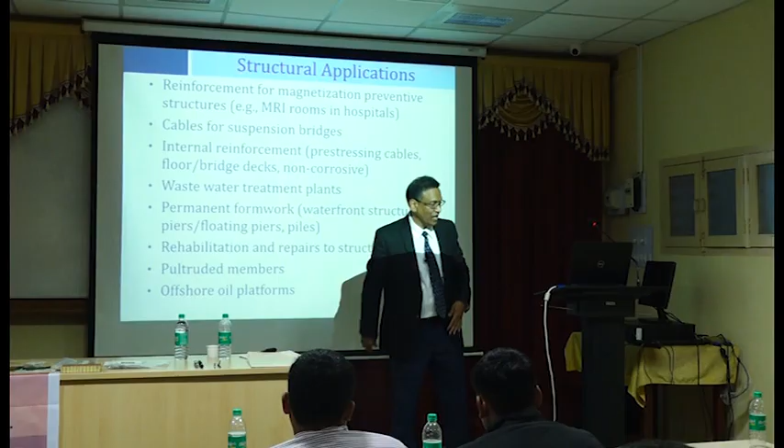Structural applications, of course: bridge decks, they are using FRP in some demonstration projects. Wastewater treatment plant, that's a very good application to consider FRP bars. We'll talk about permanent formwork and other stuff in a minute.

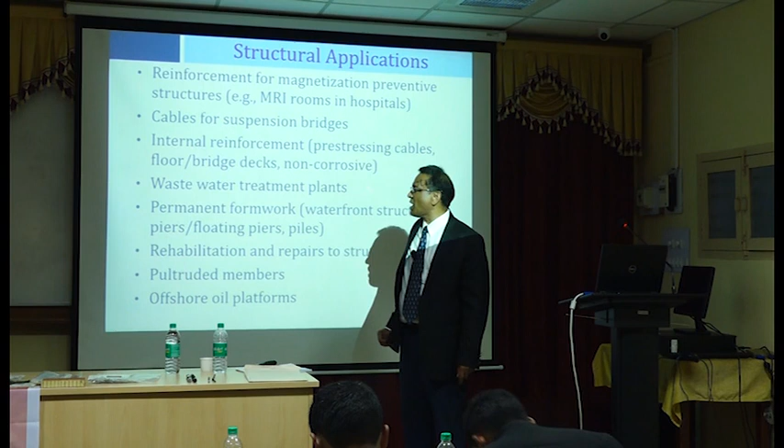Now, repairs and rehabilitation, this is really going in a big way. For example, California has lots of bridges, very large bridges. Some of you may have gone to California. You'll see those bridge columns are 100 feet tall and 10, 15 feet in diameter. A lot of big columns.

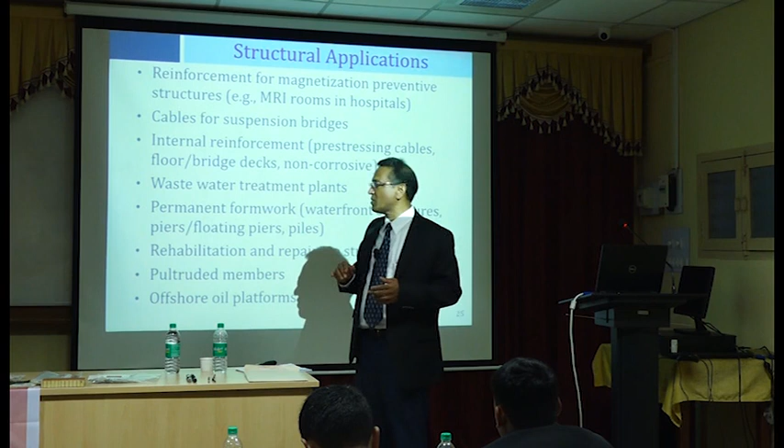So recently they changed the earthquake resistance requirement. They increased the capacity requirement for earthquake resistance. So by regulation, the state mandated that every bridge column be rehabilitated to resist larger earthquake loads.

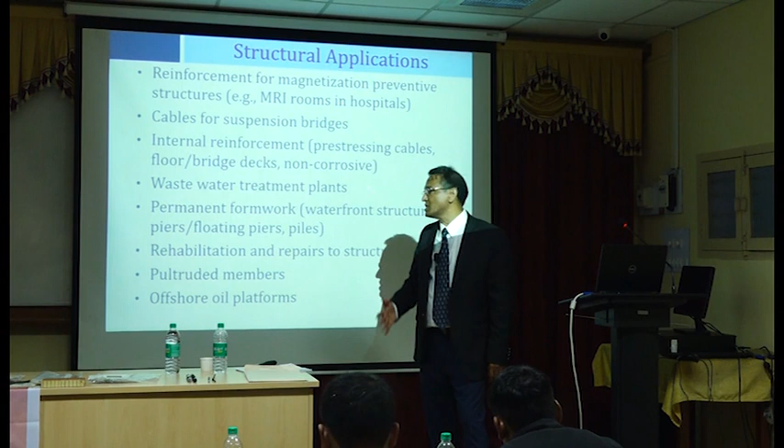That may happen even in India because of recent data. They may change that requirement and ask you to improve the strength capacity of columns. In that case, you can actually use FRP materials, but it's a different form of material. I'll talk about it in a minute.

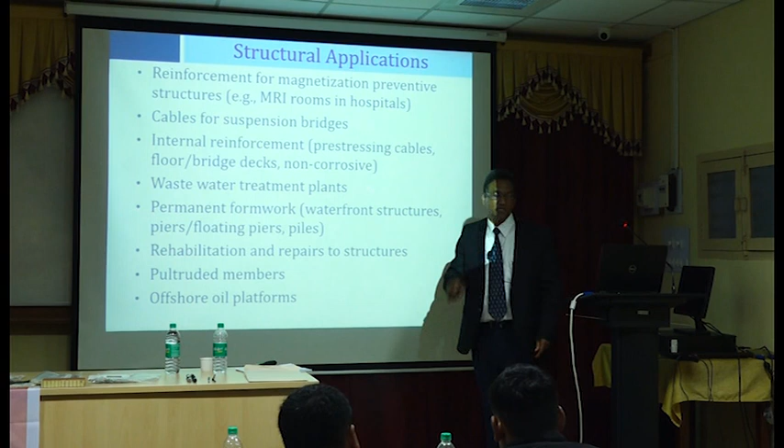And then there are pultruded members, and in offshore platforms, they use FRP quite a lot. In fact, one of the Indian companies is fabricating lots and lots of these gratings. Everywhere you go, you'll see those FRP gratings produced in India, in a lot of places.

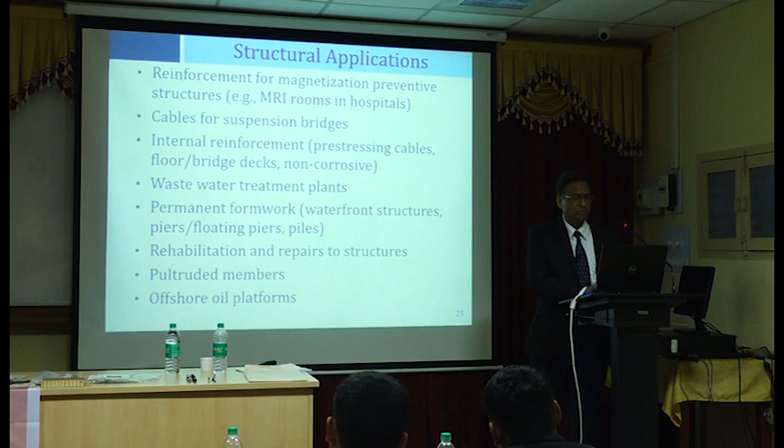So there are two, or even three, types of FRP materials. One is internal reinforcement.

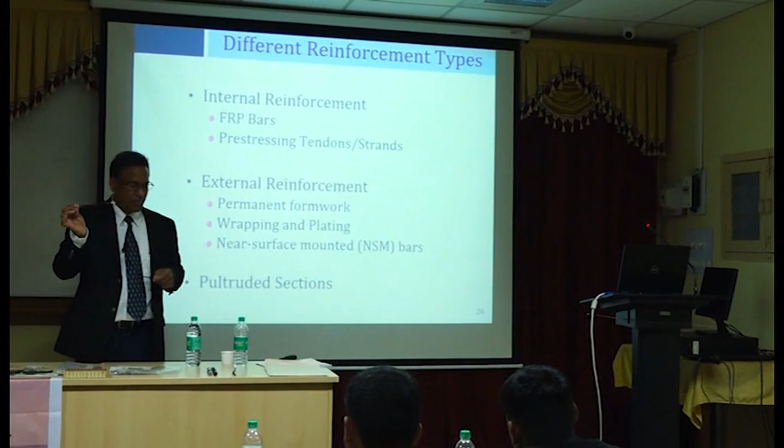I brought some samples. Be very careful. Don't touch these bars other than where I have covered them, because they have very fine fiber. It can poke you. The sizing on this one is silicone sizing, so it can give you a little bit of itch. So don't touch them anywhere other than where it is covered.

So I have quite a few samples here, and Dr. Das also has some samples. So when you get a chance, you can come up here and take a look.

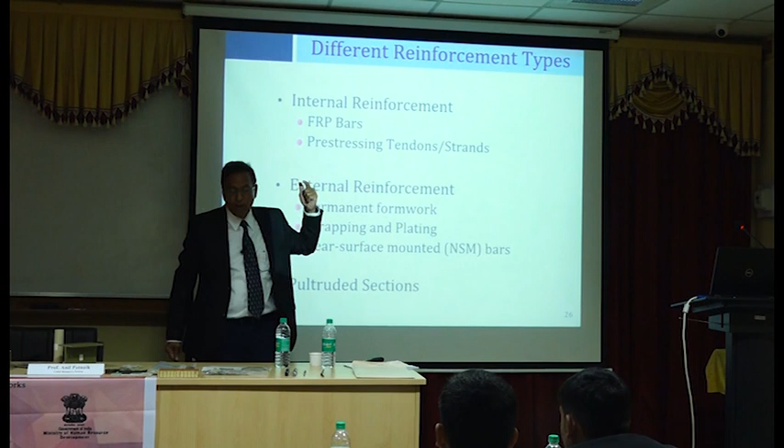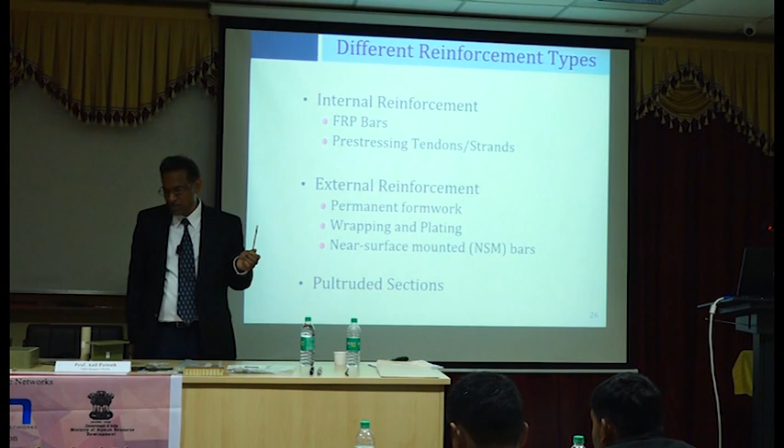So the first ones are FRP bars. Those are for internal reinforcement. Generally these bars are small diameter bars. This one is a 5 millimeter bar. 10 millimeter bars are very commonly used. Because of high strength, you can use smaller diameter bars.

And then I have the traditional steel bars. You can actually hold these in two hands, one traditional steel bar and one FRP bar, and you can see the difference, okay?

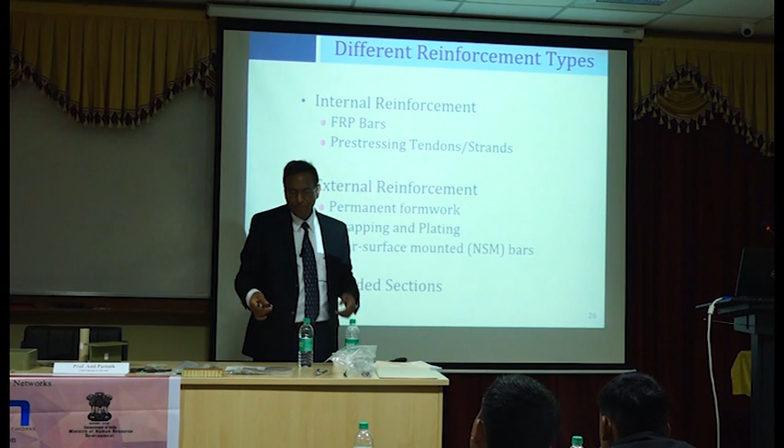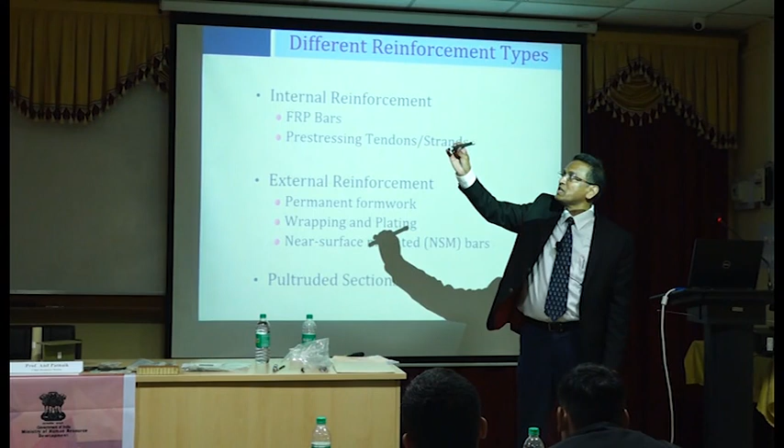I have a pre-stressing tendon. This one here, this pre-stressing strand, is made from carbon fiber. It was used in one of the bridges near my hometown, and they successfully used it in a bridge. That means it's not a theoretical product, it's a real product used in bridges.

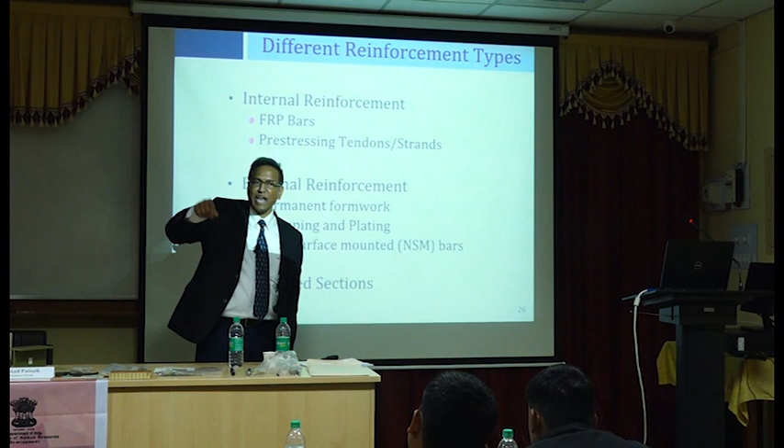And many of you may have seen the steel strands, quite heavy. They're very good, and when you are jacking those strands, it's easier to jack steel strands. I don't know how many of you are familiar with pre-stressed concrete. How many of you are familiar? Okay, have you seen any pre-stressing plant?

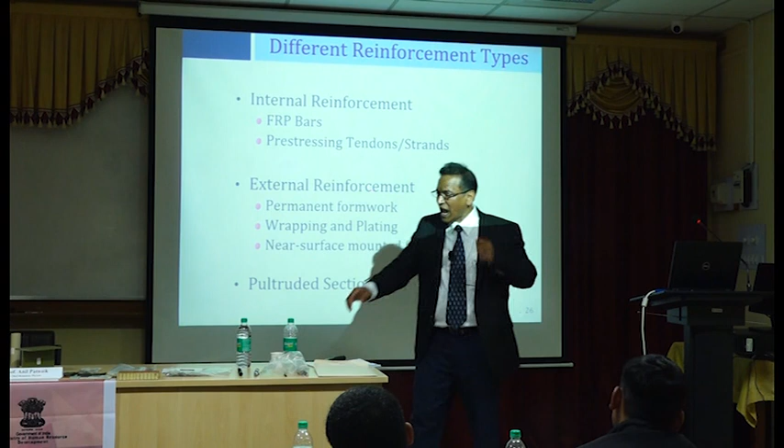Have you seen how they actually tension? Very good. So they grab on this pre-stressing strand and they just start tensioning without any problem, right? You just hold it, that's it, no problem. They don't crush.

Whereas this one here, carbon, is very soft in the other direction. So you grab on this, it will become completely crushed. So this is a Japanese design: they designed a transition piece from carbon strand to regular strand.

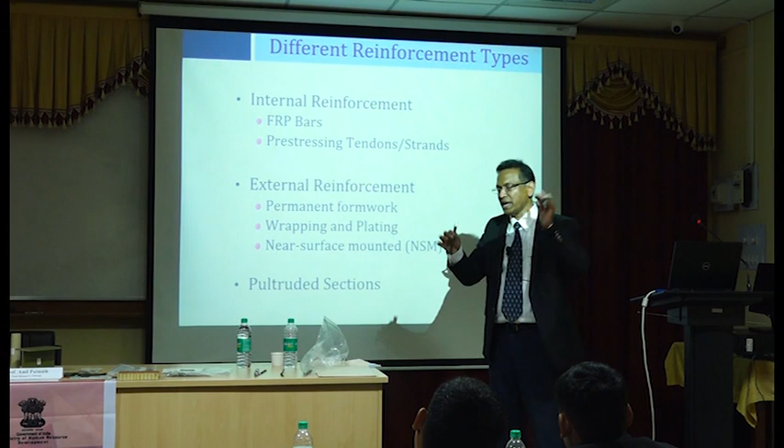And then that transition piece is actually outside the beam element or the member. So they pull on this steel strand, and once it is fully stretched, they anchor it, and that's it. And it worked very well.

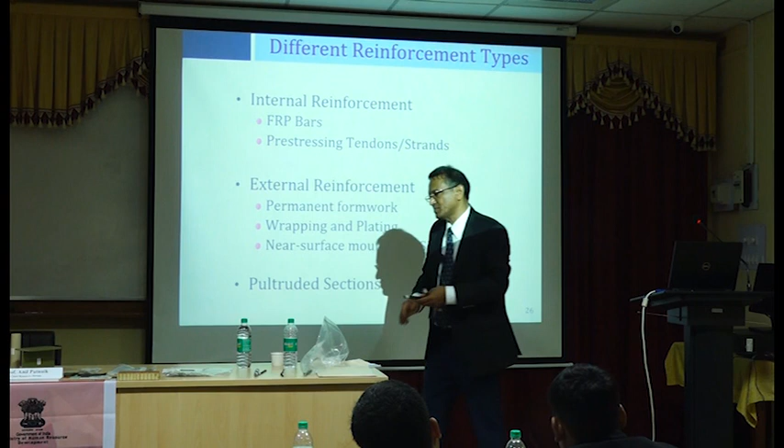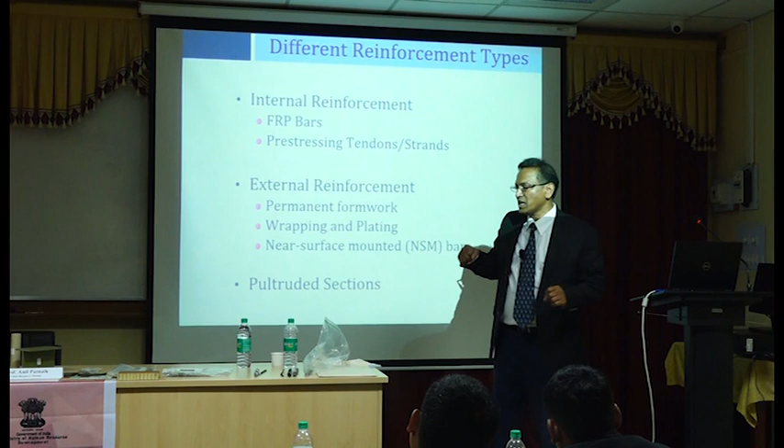It's primarily in where I live, where Ohio State. Mostly we use pre-tension applications. That means it is tensioned first - the strands are tensioned first. You place the concrete, let the concrete set, and then you cut the ends of the strand. So that's pre-tension, right? It's not post-tension.

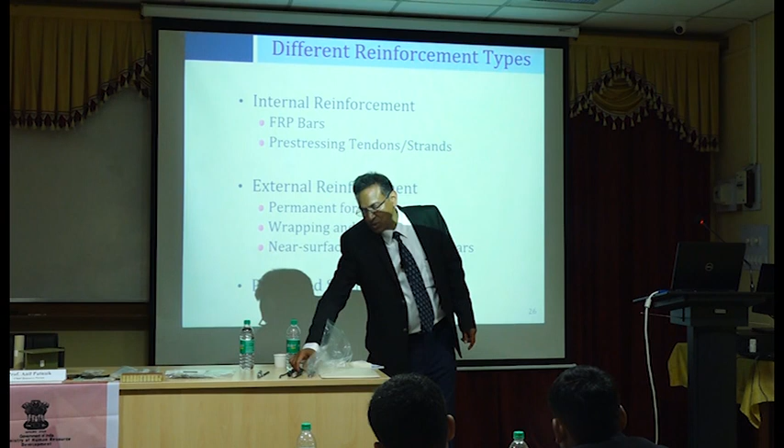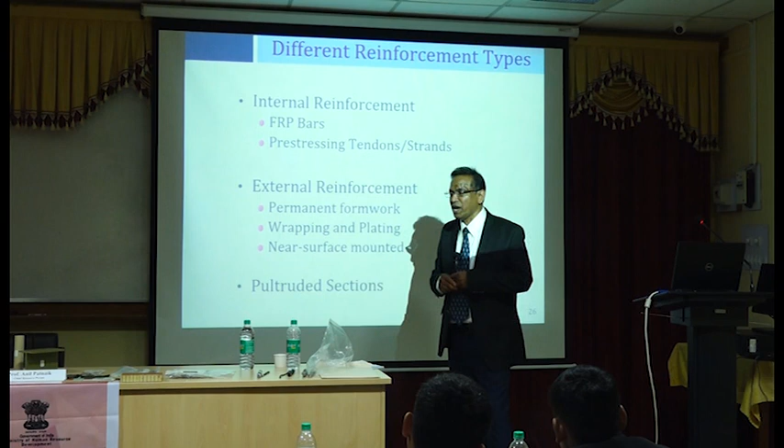So carbon strands may or may not be useful in post-tensioning, but in pre-tensioning for sure they can be used. So in my state, for some reason, we always use pre-tension because it has to be done in a plant environment, and we have only a couple of pre-stressing plants in this state.

That's your pre-stressing. ACI 440 has one document just for pre-stressing strands and pre-stressing members, design of pre-stressing members. You can take a look, but this is not as close to application as FRP bars. What I mean is there's a long way to go before you can use pre-stressing tendons made from carbon fiber or any other fiber.

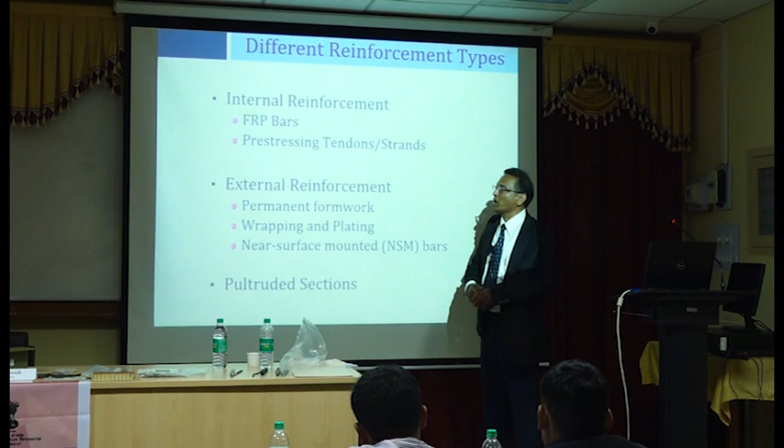There's also external reinforcement. We won't talk much about this at all. I'll just give you a brief introduction, but our focus will be just on internal reinforcement. We need another week for this type of external reinforcement, and we're not going to do that because of the time constraint.

So you can have permanent formwork. I'll show you some pictures of what it is. Permanent formwork is like this small tube, but they make larger tubes, and that can go in, then you place the concrete inside this. It becomes a very good member after you do that.

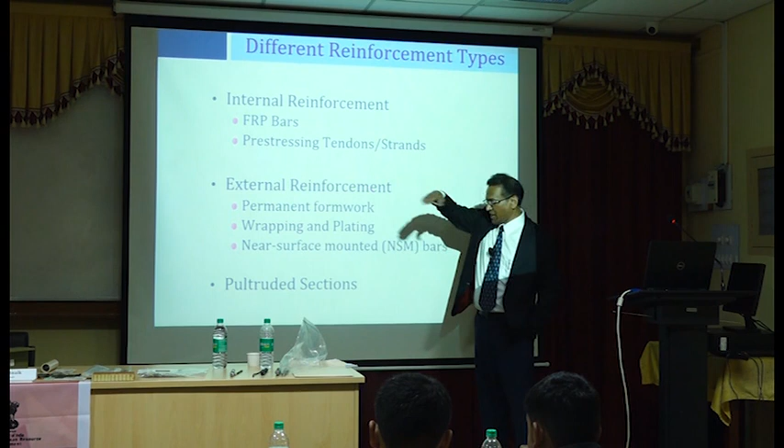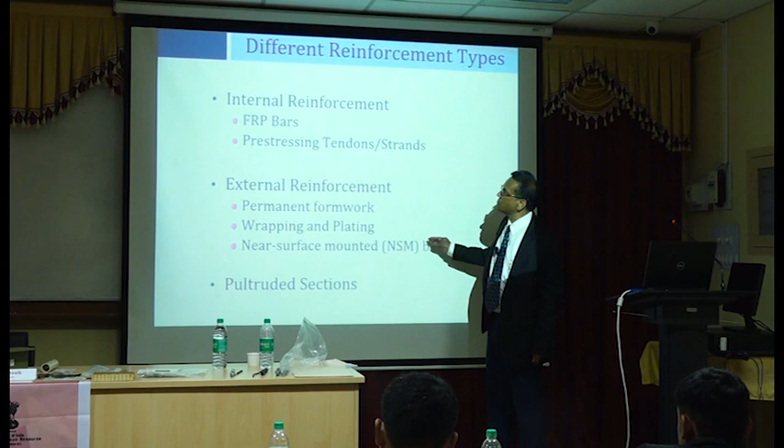Wrapping and plating: wraps means sheets wrapped to columns. Near surface mounted bars, design of NSM members is similar to internal reinforcement design, but I put it here because it's a surface application. Then pultruded sections, you have FRP pultruded sections, these ones. It's just like steel members, okay? Just like steel members, everything exactly like steel members.

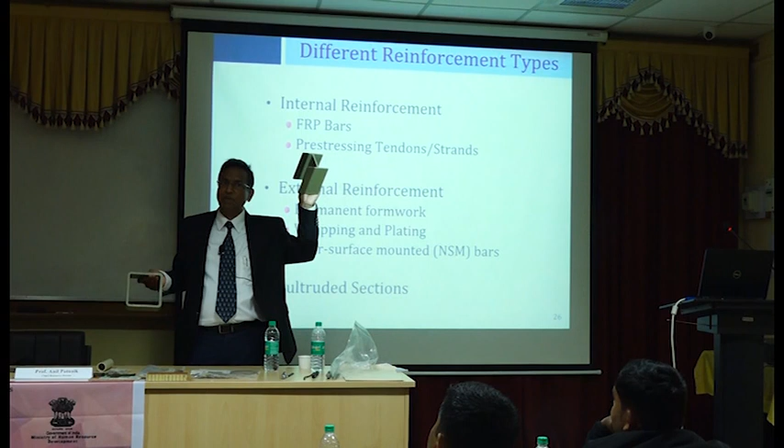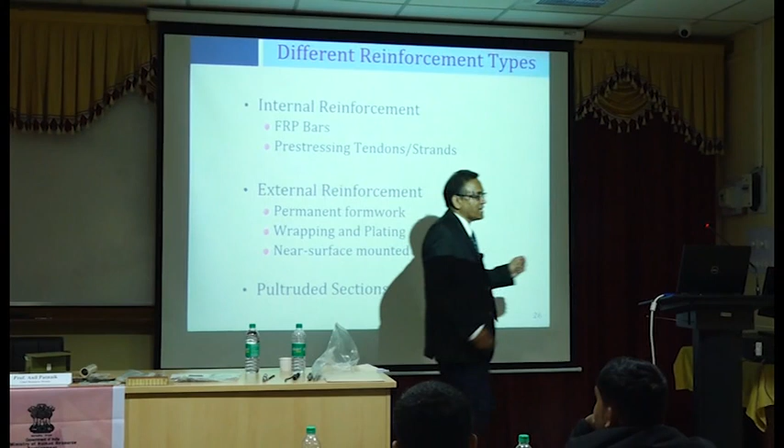And they use this in waste treatment plants. They are able to use this. It's not as strong as steel, not at all, particularly in pultruded condition. So those are the three classes of applications.

So let's talk about the internal reinforcement. This is a bridge deck reinforcement. This mesh here is a bridge deck mesh. Unless I tell you that's FRP, you will not really know that it's FRP. It's completely similar to steel reinforced mesh.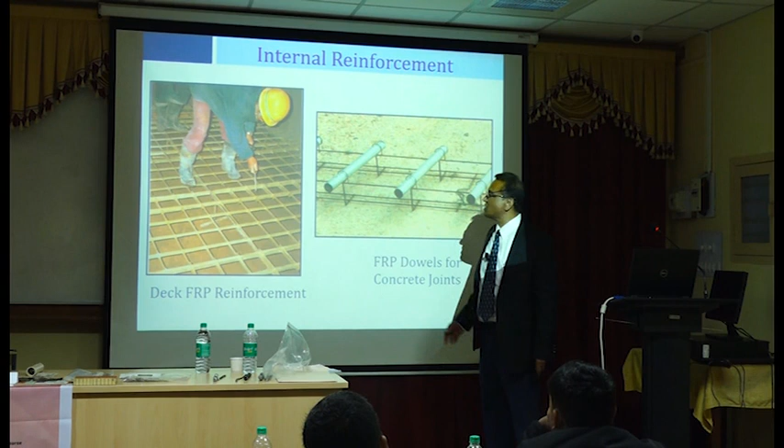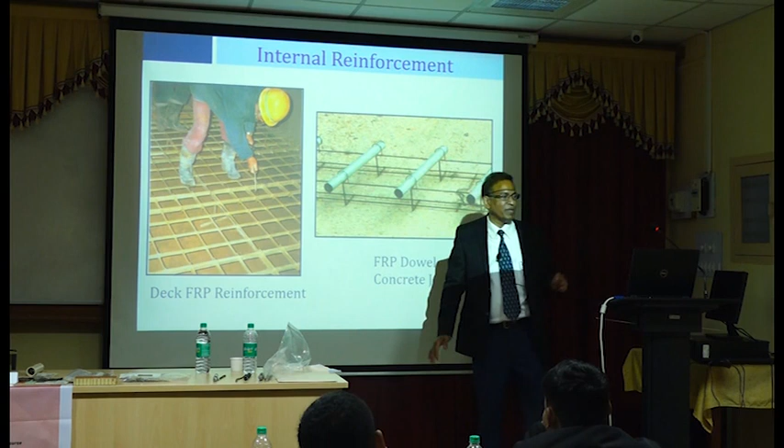Then dowel bars. Are you familiar with dowel bars? Yes, very good. So dowel bars nowadays are very common. They use FRP dowel bars, which is common. The only problem with dowel bars, we'll talk about it when I explain micromechanics: the strength in this direction, the dowel action, is very small because the fiber is in the longitudinal direction. Strength in the transverse direction is very poor.

So that's a problem, but they are using FRP dowel bars. Internal reinforcement looks exactly or similar to our steel reinforcing bars. I have just a few samples here, you can take a look.

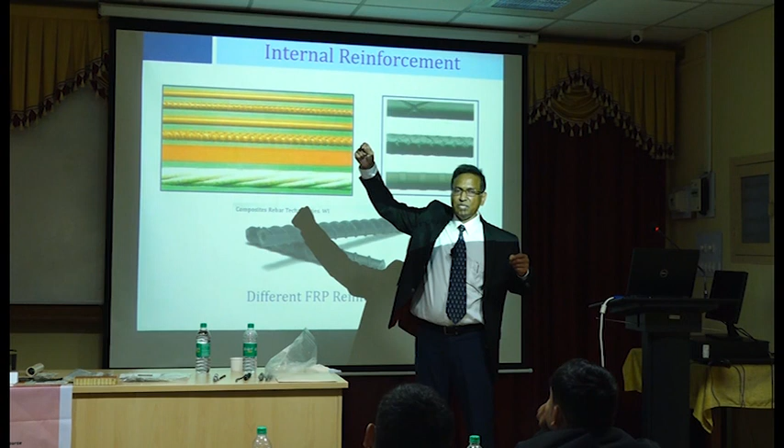One of the major problems here is the deformations on the surface. Surface deformations is a big problem. These deformations are made with a spiral fiber wound spirally. Does it make sense? But that's not as strong as your steel ribs.

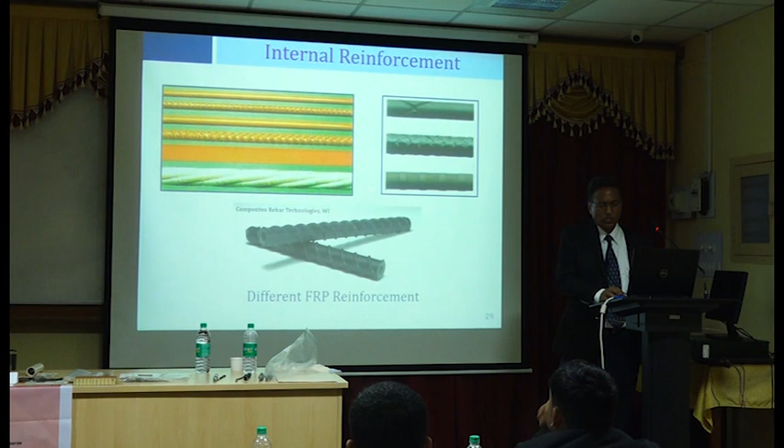Steel ribs are very, very strong, and the ribs engage the concrete surrounding the bars, and that's what gives you the bond strength or the pull-out strength. Whereas in FRP, this can easily shear off at the surface, so these deformations can shear off at the surface. That's the major problem, so you need longer development lengths or longer embedment lengths. They're trying to copy the surface geometry of steel bars, but it is not as strong as steel ribs.

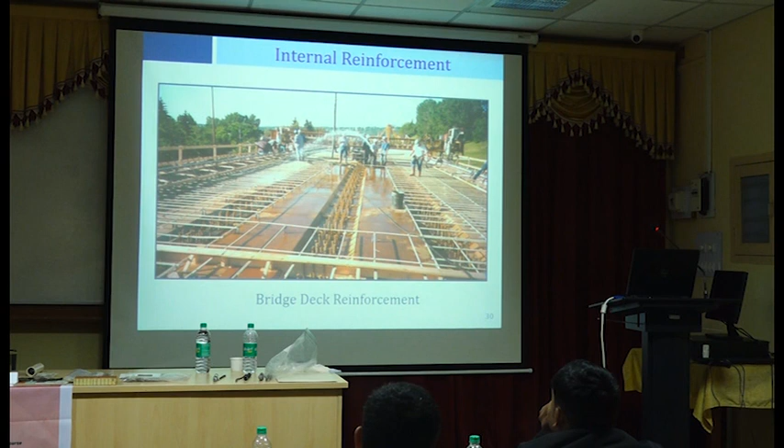Same thing here, this is a bridge deck. This is a steel bridge with all these shear studs. You can see the shear studs, and then you have FRP reinforcement. So it's successfully used, and slightly more expensive material-wise, but it's possible to implement those in those applications.

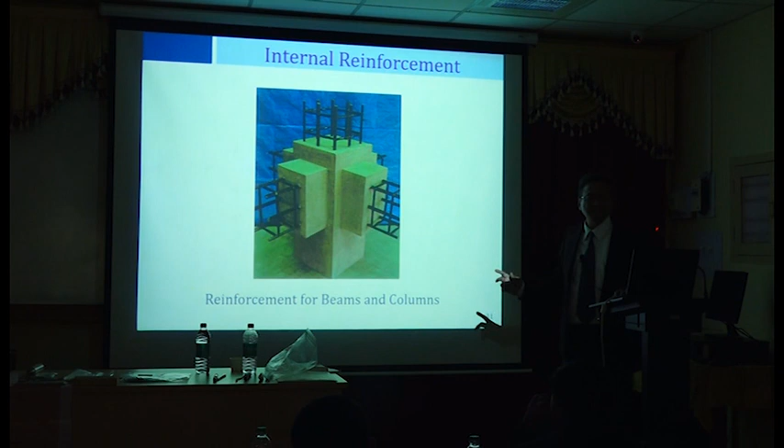So here we have a beam column joint, which you can make with FRP bars. It looks something like this. We'll talk about the design of this kind of members. We really don't want to use FRP anywhere there is compressive stress or compressive loads.

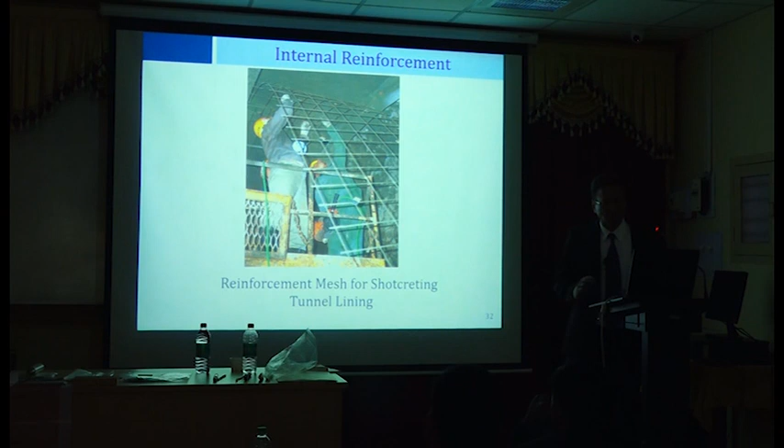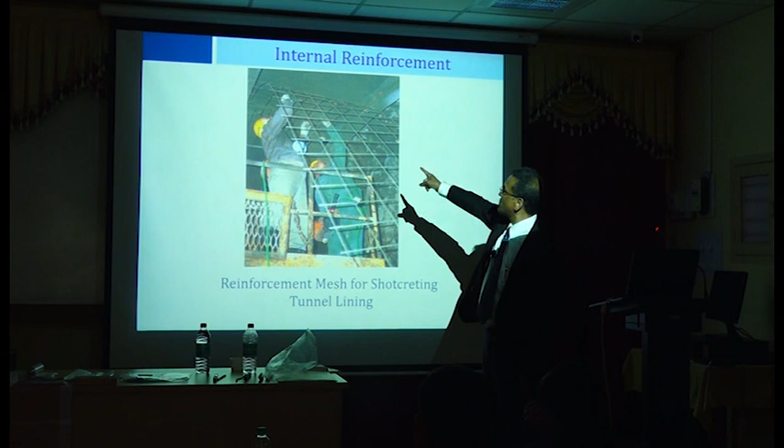So tunnel linings, this is a very common application these days, because look at this guy, it's an overhead application, right? Imagine using steel mesh here. They do use steel mesh, of course, but this one here is so light. He's able to handle one person here, another person here. Two people are able to handle this mesh, which is a big advantage.

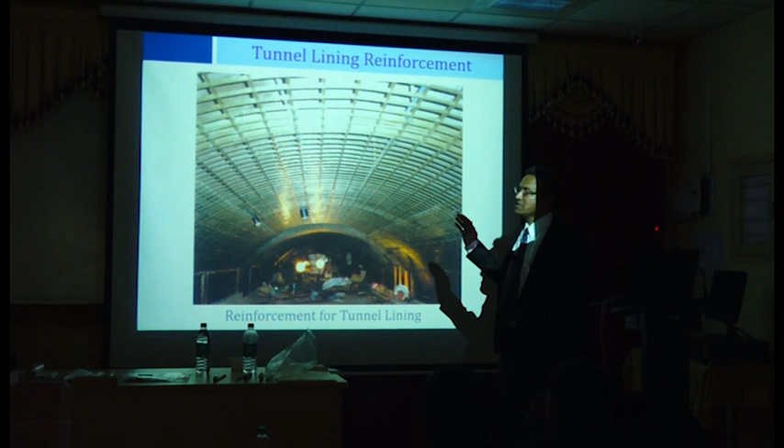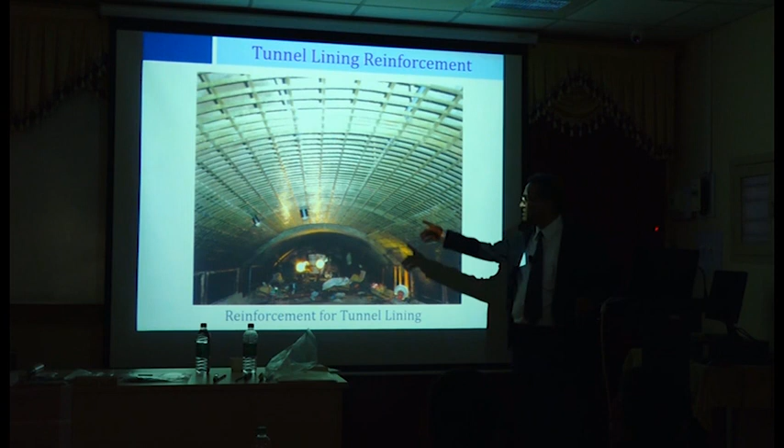Once it is in place, the mesh may look like this, just like steel bars. Tunnel lining is always subjected to a lot of moisture. There's always water seeping. If you have walked near the underpass here on campus, you see it's all wet. That water is coming from somewhere, and that's exactly what happens in this tunnel lining here.

So FRP is a good material. Of course, they do a lot of shotcreting for liners, but sometimes you need this kind of thick lining with a lot of reinforcement.

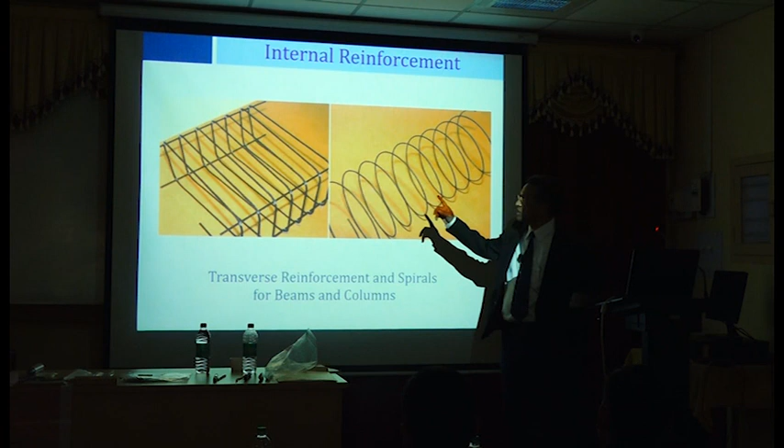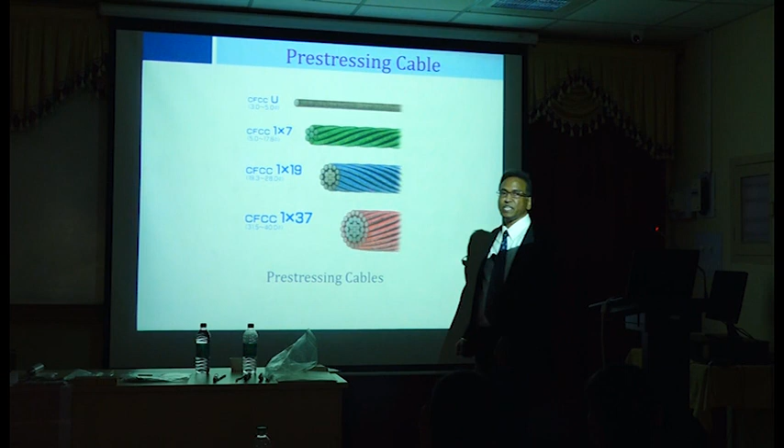We have prefabricated ties and spirals. That's possible, we'll talk about some problems with ties later. And then pre-stressing cables, I showed you one of those. These are all Japanese products, and they are available to use. They will give you technology for even tensioning these strands, with a patented anchor system. I have no details, they do it themselves, but this can actually be tensioned.

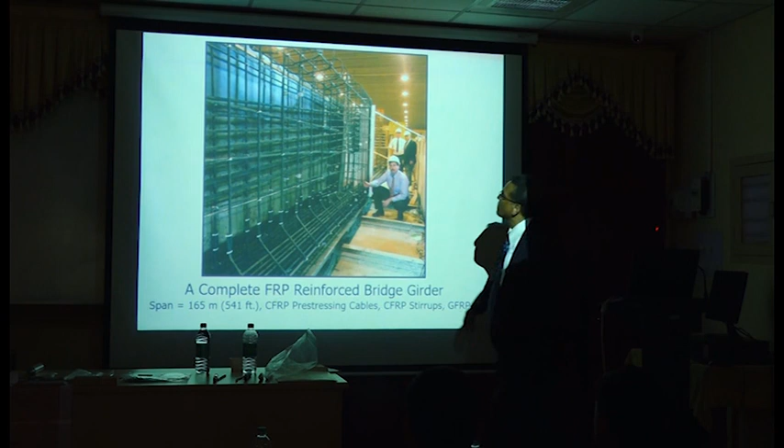So precast, pre-stressed concrete bridges can be done with FRP. It's a huge beam, you can see how tall it is. These people are about 5'6", 5'10", 6 feet tall.

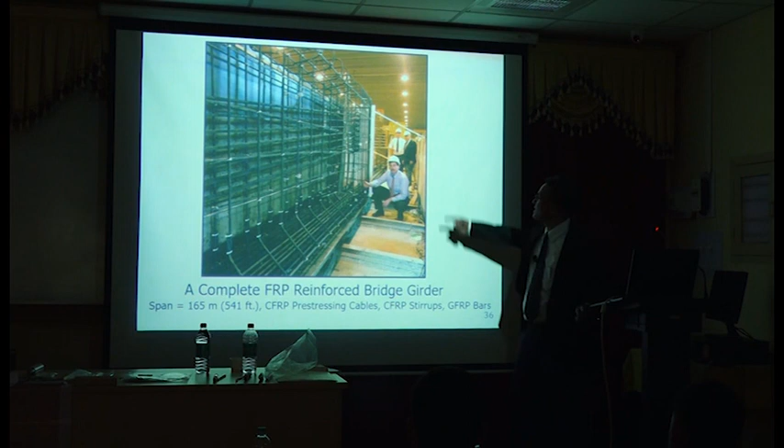I don't know if anybody knows Rizkalla. If you have done any research on FRP bars, you'll see the Rizkalla name. This is that Sami Rizkalla. He's a very eminent professor.

Now let's talk about external reinforcement. Here we have permanent formwork, wraps, near surface mounted bars, and so on.

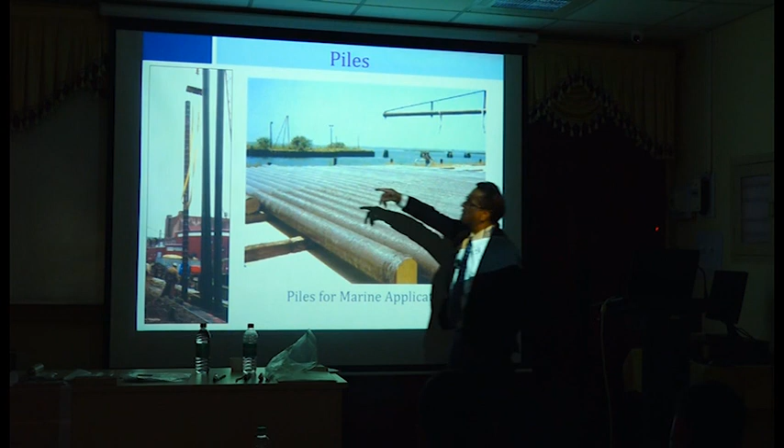What you see here is precast piles, so you have tubes like this. Here they are actually placing the tube first, then they'll place the concrete. But here they have tubes already filled with concrete. You pick them up just like normal steel piles, and then drive them with this pile driving equipment. You just drive the pile, it's like just any other steel pipe. You can do that quite easily, or at least they have done it quite easily.

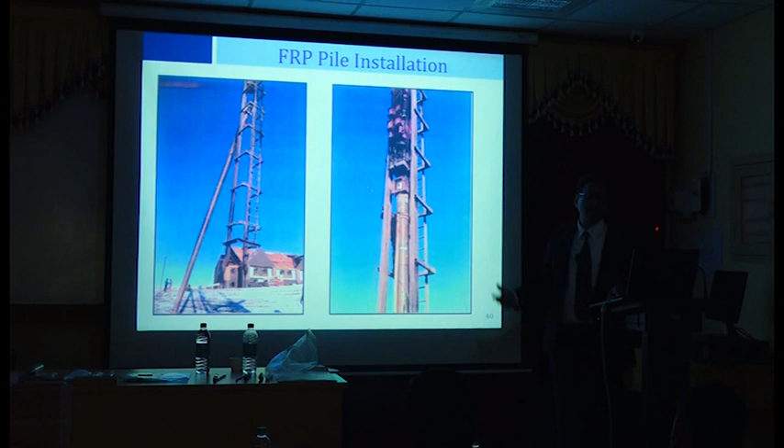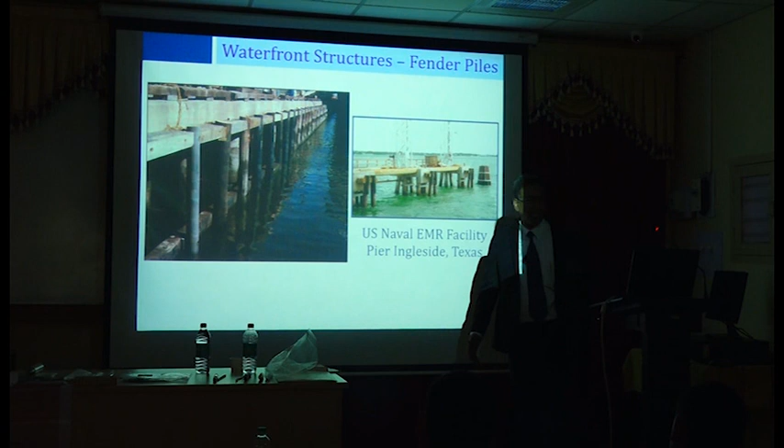For waterfront structures, you have these fender piles. Fender piles can be FRP tubes filled with concrete, that's what you have here. Same thing here, these are some naval facilities, so they have been using this for oceanfront structures.

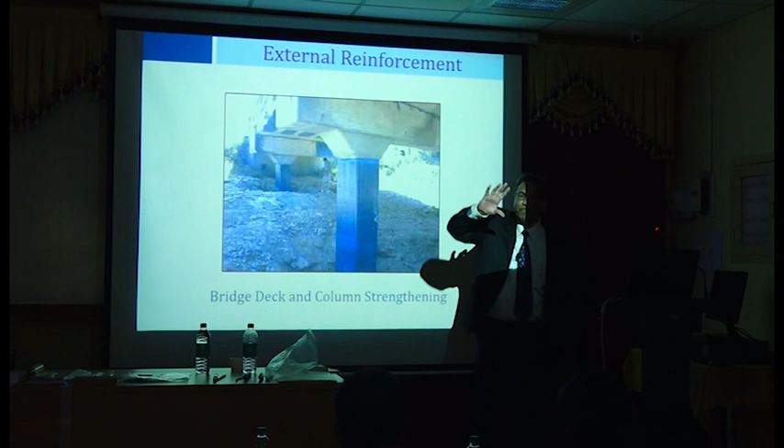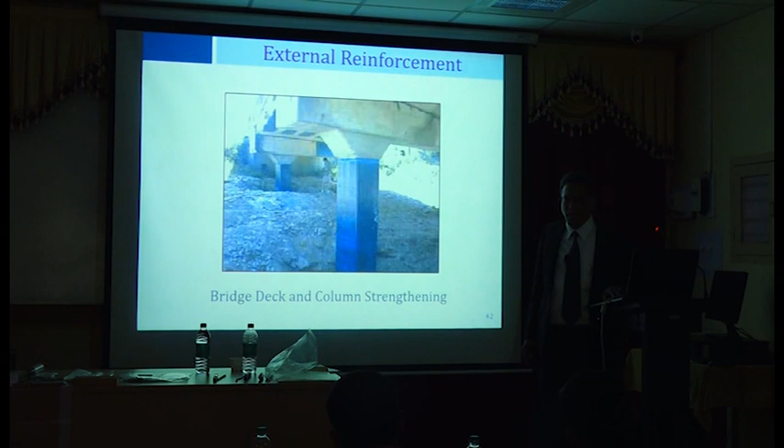You can have wraps for columns that will improve the compressive strength of columns. Generally speaking, circular columns will have better effectiveness in terms of strengthening. We are not going into design basics for external wraps, but generally speaking I can explain it to you without any slides. So this is another type.

This is exactly what they are doing in California. They are required to wrap all the bridge columns, I think by 2025 or something like that. I'm not sure, but it's mandated to rehabilitate all these bridge columns, so that's a big business in California. They are using a robotic arm that wraps and goes all the way to the top.

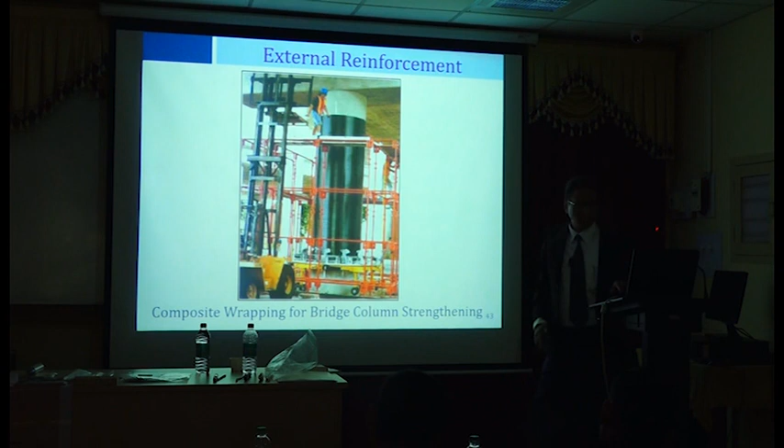So what's the effect? How do we get the effectiveness from FRP wraps? This is what is done. Let's say this is a bridge column, and it completely crushed the concrete due to overloading in one of those earthquakes in Japan, I believe. When the load is in the vertical direction, the column is overloaded and everything is crumbled. If you see carefully, these bars are actually bowing out.

You can see that, right? These reinforcing bars are bowing out. Unless you have very closely spaced spirals, this kind of failure is very common.

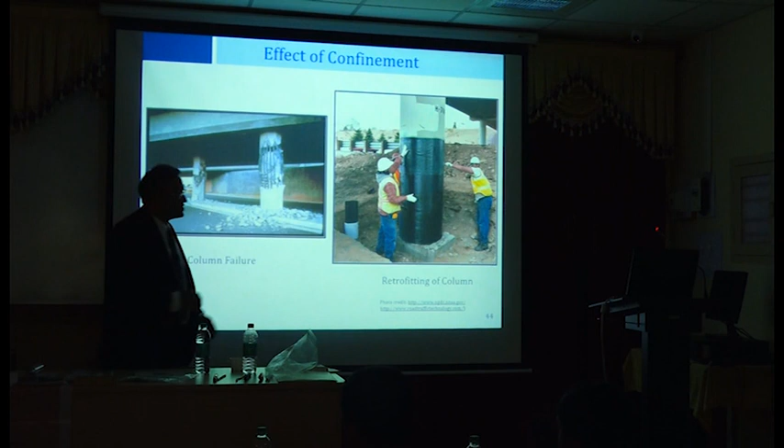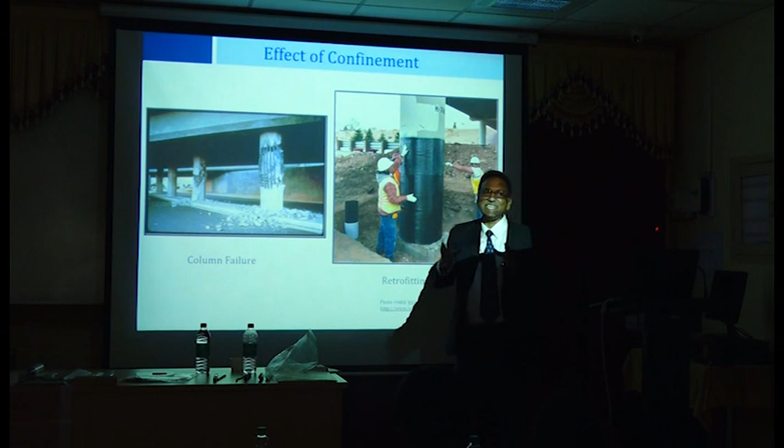So to prevent this, you put the wrap, it's like a sheet. There are some sheets here, I can show you. Those sheets are wrapped with a polymer-based resin, which will impregnate or completely soak the sheet. When you wrap it, it's in place and it sets within a very short time, so you don't have to hold it for hours. It just sets very quickly.

And then when there is axial loading, there is a tendency of the column to expand laterally. You apply a load like this, you can see it here. The tendency is to expand laterally.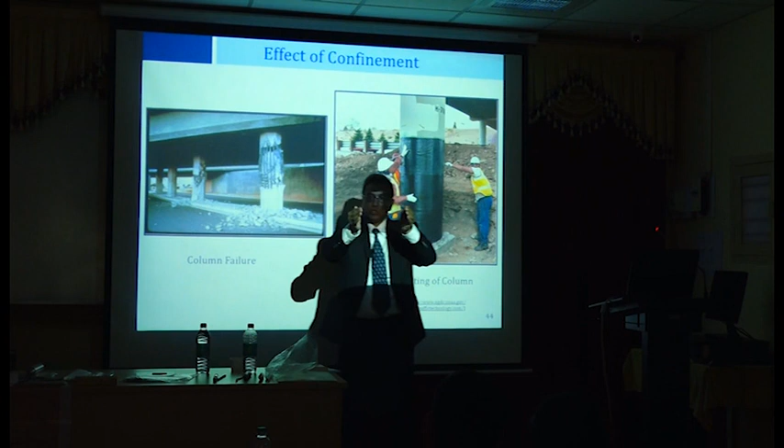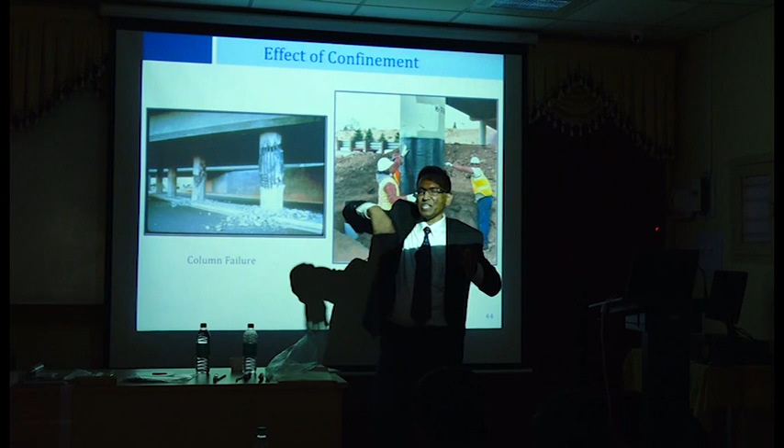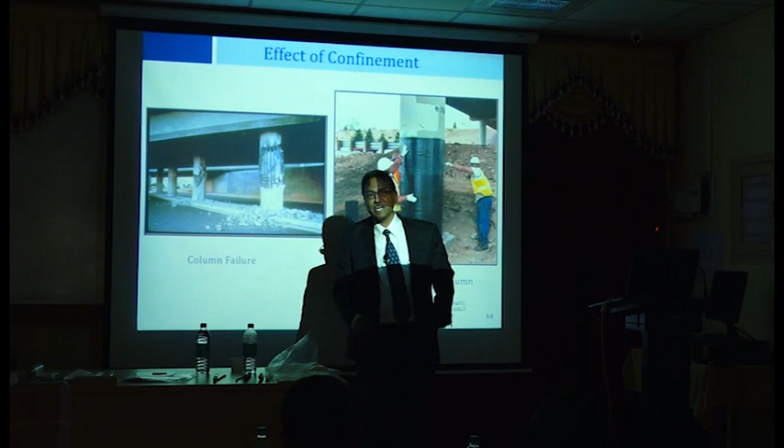This fiber wrap is placed in the circumferential direction. That means it's holding it in a hoop direction, preventing expansion. This wrap material is very strong fiber, probably around 2000 MPa or more in tensile strength. So you put the fiber in the circumferential or hoop direction, and that prevents lateral expansion. Because of that, you can increase the strength by a factor of 3 or 4.

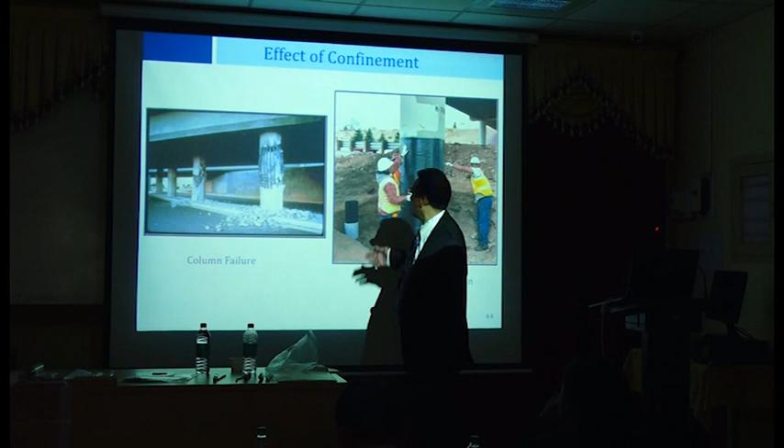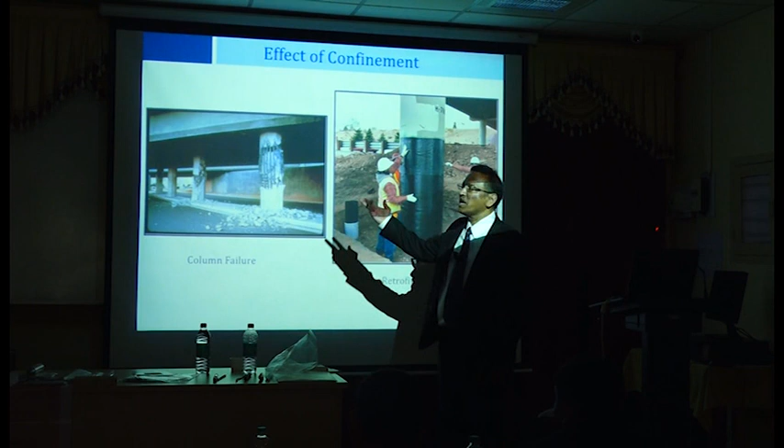We can quite easily achieve very high strength. We've done a lot of testing with basalt fiber. I have the fabric here. This fabric is not very strong, but with just 2 or 3 wraps, you can increase the strength by a factor of 3.5, easily. So if your original column can take 100 kilonewtons, after wrapping it will take 350 kilonewtons, which is a tremendous increase. That has a lot of potential, even in India, I think.

So if you are interested, you might want to pursue that kind of research and work.

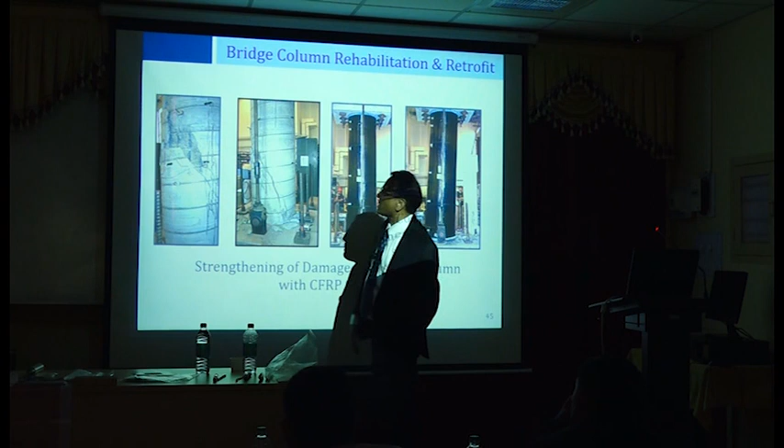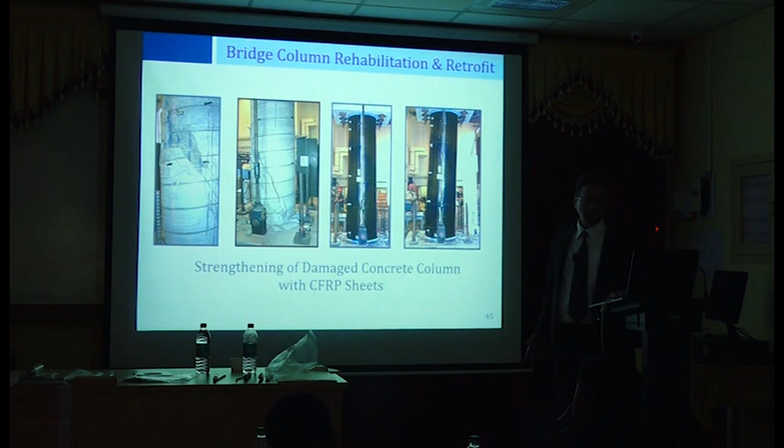This is from one of the big labs in California. They did full-scale tests, completely destroyed a column here — it's completely crushed and failed. Then you apply the wrap, and they do the testing again. Perfect — it retained all the strength, and actually gained more, about 15-20% stronger than the column without any wraps.

You can actually use these straps. We have some straps here. He says it is pre-stressing straps, but anyway, you can use those straps and glue them — or glue is a very non-technical term — you put this adhesive and apply these straps just on the surface. That increases the strength significantly.

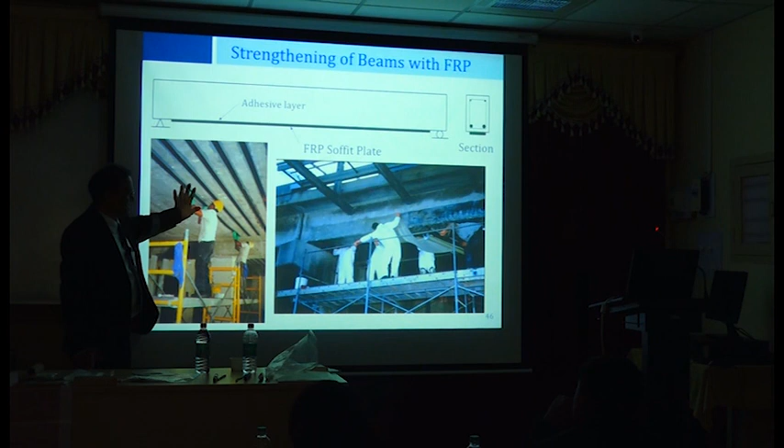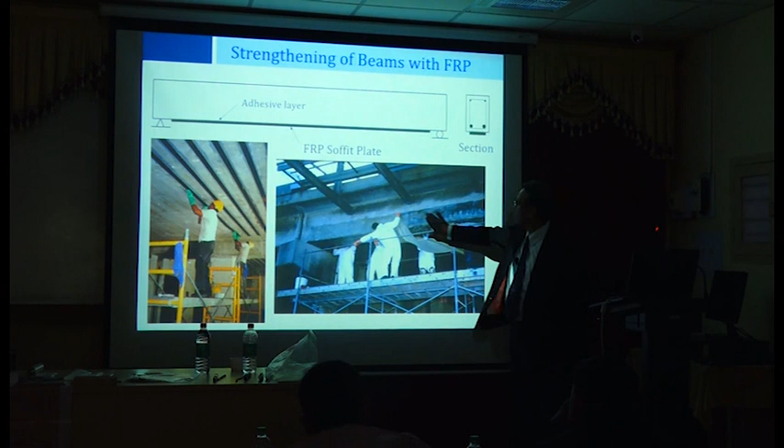It's a very common method to increase the strength of beams. In this picture, they are attaching fabric or wrap onto a beam surface. There are a lot of difficulties in applying this kind of wrap on surfaces — you have to do surface preparation, design it carefully, and it is labor intensive.

You can see that. Anything involving labor will cost a lot of money, so that's something to keep in mind. And the workers involved are more skilled than other workmen.

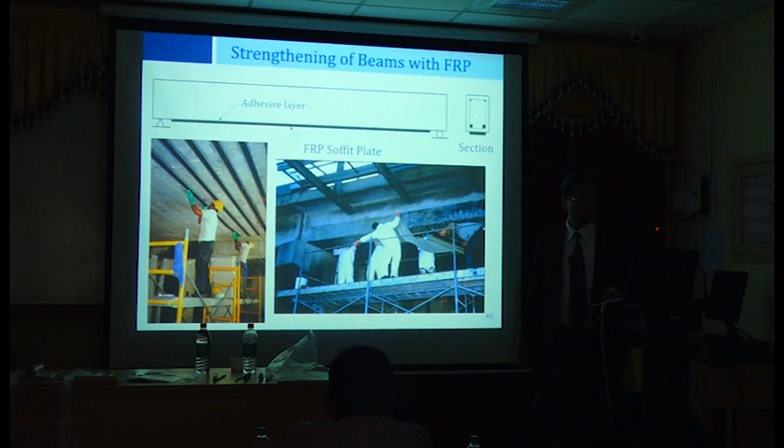In one of the bridges in Manitoba, Canada, they actually strengthened the web of a pre-stressed concrete beam, so that's also possible. Everything is possible — it costs money, but if you want to improve the strength or performance, you can do that. These are the external reinforcement applications.

We won't talk about design methods for this. You can get a copy of ACI 440.2R — 440.1 is for internal reinforcement, and they have a similar report for external reinforcement. You can get that, and you'll see all the guidelines given in that report.

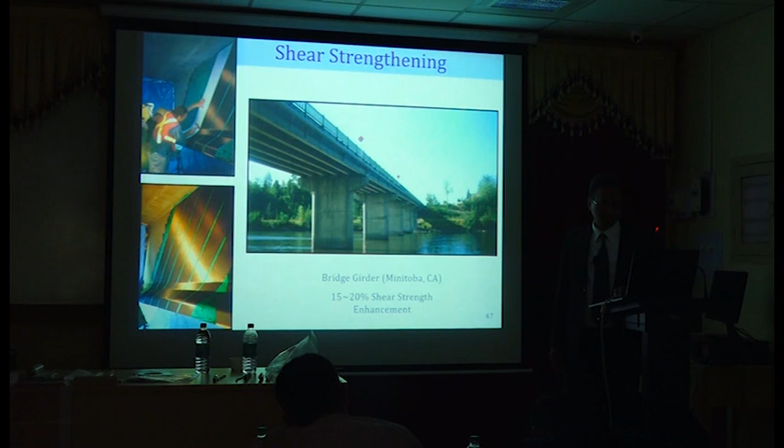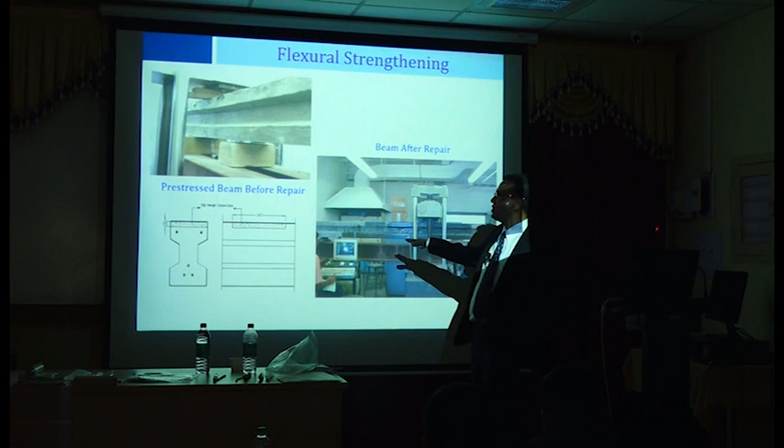In my own lab, we've done a lot of this kind of strengthening trials. For pre-stressed concrete beams, we had 17 foot, about 5-6 meter beams. We completely loaded them to failure, and the top was completely crushed. After the failure, we removed the top, added grout to make up the geometry, and then wrapped it. We were able to not only recover the strength, but also increase it.

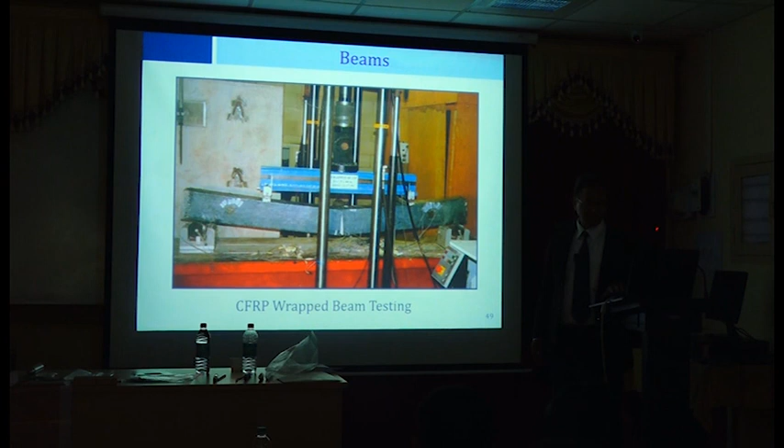There are a lot of publications on strengthening of existing structures. You can take a look.

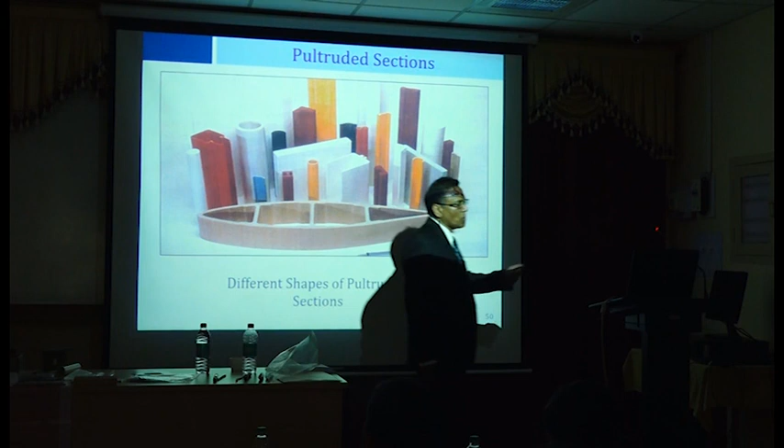And this is our pultruded sections. I have some samples — like I said, we have I-shaped sections, hollow sections, tubes of different sizes. I just wanted to bring something light, so I brought this small size, but you can get them in large sizes as well. There are lots and lots of these pultruded sections available.

There are no American guidelines for design of pultruded sections — well, I won't say none, but there's a European guidebook used for this kind of pultruded section. Can we use any steel codes or design? No, that's the problem — that's the big problem.

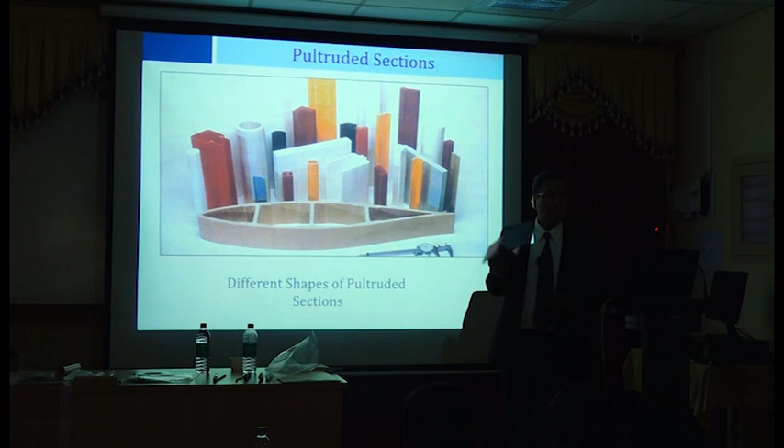That's the reason, if you see, these manufacturers have their own data sheets. If they are able to provide you data sheets, that will be great, but generally they don't have them. Without going into too many details...